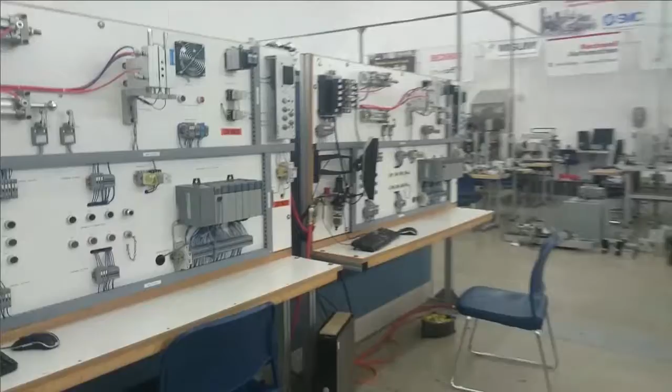For this industrial robotics experience, you're going to start by going over to the sim building, and you need to go find room sim 190, which is this automation studio. The folks over in the sim building have set up a couple of these training boards to teach students all about how to program PLCs.

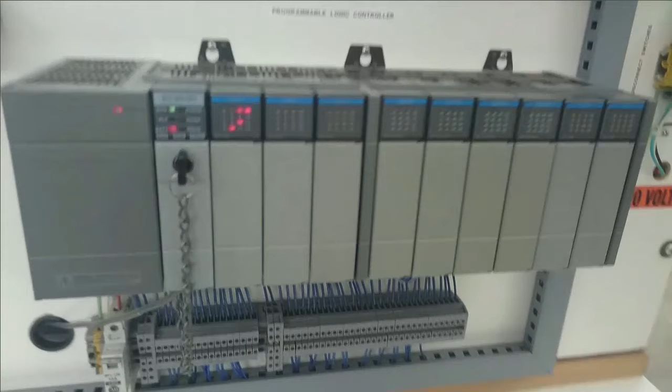So go over to these boards here and take a quick look around at the parts that are up on the board. And I'm going to start today by giving you a brief walkthrough of what each of these parts is. This board contains a complete setup of parts to introduce you to industrial automation. To start with, take a look at this box over on the right hand side of the board near the bottom. Each of the parts on this board is the industrial version of different kinds of parts that we've used in lab before to do our mobile embedded robotics.

In general, the kinds of parts that we use in our labs are the parts that you would use to make robots that are mobile. In order to make mobile robots, you need to run on lower voltages and use small currents so that the batteries that you use to run your robotic devices will last sufficiently long. But in some cases, you would like to be building robots that will not be mobile. They won't be driving or flying or swimming or being worn by someone. These robots would be perhaps located in a factory and attached to the ground, and they can be connected to a power source at all times.

Now you know that with the parts that we use in lab, in the case where we want to use a part that runs on a higher voltage or uses a higher current, we have to use some kind of external part like an H-bridge or a transistor or a relay or something like that to prevent the higher voltages and currents from going through our microcontroller. Now, in the case where your entire system is connected to power and all of the parts you're going to be using run on higher voltages or currents, it makes sense to use a kind of controller that can handle these higher voltages and currents. And the most common type of controller that can do this is called a PLC. And that's what you see here in this box.

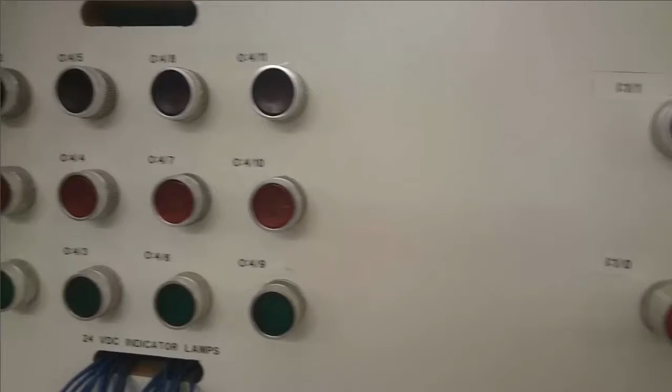Now, if we look at other parts on the board, you'll see over here we have some push buttons. These would be digital inputs. And you'll also notice that each of these has a label next to it. We'll be using that later. These things over here are LEDs, so they are outputs. You'll notice that the labels by the LEDs, which are outputs, start with an O. The O is for output. If you look at the labels next to the buttons, they start with an I for input.

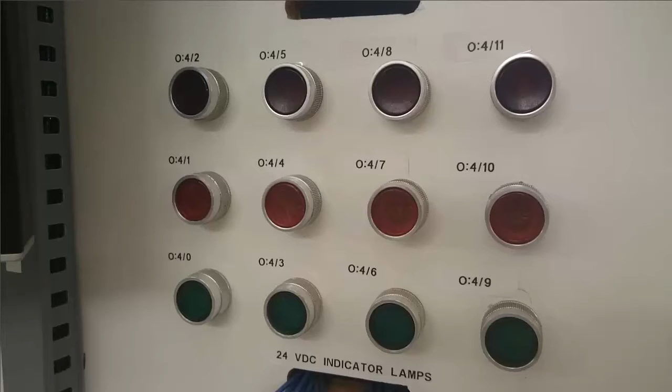So we have a bunch of LEDs, a bunch of push buttons, and if we scan up here, we also have some pneumatic actuators. Pneumatic actuators are a type of actuator that can be either on or off. We can extend the actuator or we can retract it, but it's not very easy to get a pneumatic actuator to hold a position between its extended position and its retracted position.

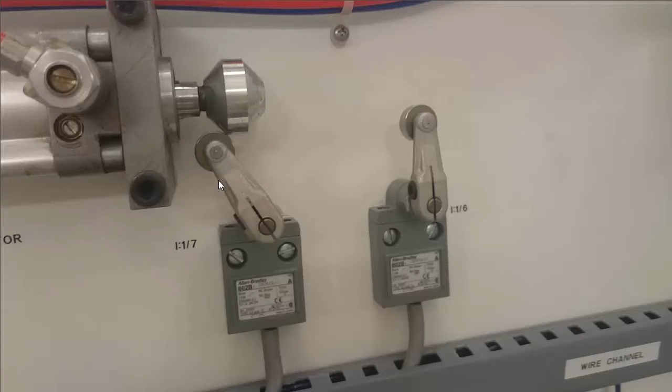You'll also notice to the left of these pneumatic actuators, these are valves. This is how we extend and retract pneumatic actuators. We do it by turning valves on and off. Each of these valves has two tubes leading from it. One of the tubes is for extending the actuator, and the other tube is for retracting the actuator. So you'll notice that these are also labeled with an O. This actuator also has a switch that can determine whether the actuator is extended or retracted. So you'll notice that the label next to these switches starts with an I because this is an input.

Now, the computer is where we're going to actually write our code. On the computer, find the folder that's labeled Dr. Sodeman and open that folder. Here we have some code templates that have been made for us. In this folder, start by finding the file that's called Exciting Demo.

We're going to start by just running this code that has already been written for you so that you can see a demonstration of what the different parts on the board can do. Double-click on this file to open it. This will also allow us to learn how to download code to the PLC and run it. Take a look at this code for a moment.

You'll notice that this screen looks very different than the kind of code that you are used to writing for the PSOC. The kind of code that you write for the PSOC is the language C, and it's a kind of a language that's called structured text. In contrast, a PLC uses a kind of a language that's called ladder logic. It's called ladder logic because, as you see, it has these wires strung from the left to the right that kind of resembles the rungs on a ladder.

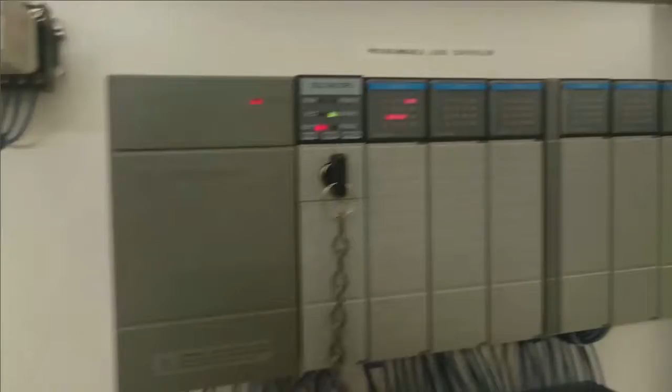So to download the code, first take a look at your PLC. There is a switch on the PLC that can be turned, and it can be turned to point at Run, REM, which stands for Remote, or Prog, which stands for Program. Switch the key so that it's pointing to the program, like that. And then back in your code, up here in this drop-down list where it says Offline, click on Download. Click OK to proceed with the download, or click on Yes, and the code will be downloaded. Then it will ask you if you want to go online, and say yes.

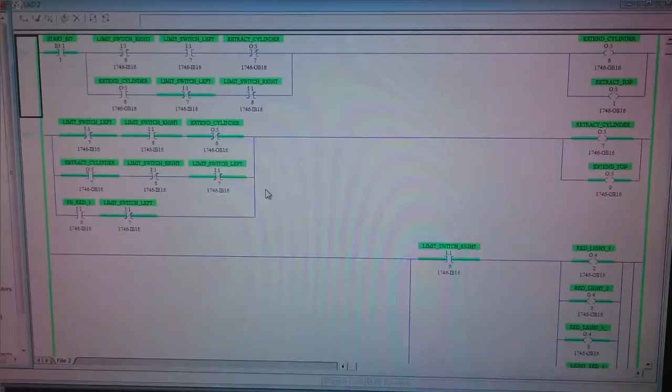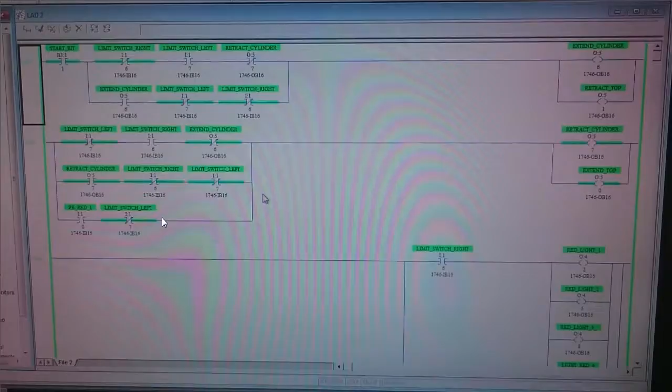Now, the code is not running right now because you first have to switch this switch over here to run. Now, the code is written to start when you press this button. So press the button and all of the different kinds of outputs will cycle through their on and off states. If you watch the code while this is running, you will notice that there are these green lines. Let me go back and look at this again. That turn on and off. The green lines are showing you which of the inputs are being actuated and which of the outputs are being actuated, so that you can watch what's happening in your code while the code is running.

Now switch this switch back to program to make the program stop running. And the next thing that we're going to do is write some very simple code ourselves to help you see how ladder logic works. Close the existing demo code and go back into the Dr. Sodemann folder. In the Dr. Sodemann folder, find the file called Robotics template.rss. Double-click it to open it.

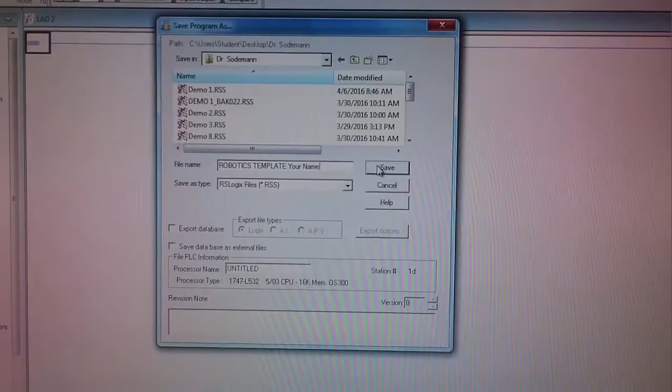The first thing you should do is click on File and then click on Save As. For the file name, give it a name that includes your name or the names of your group members, and then click on Save so that you can save this file to access it later on, and so that other people can access this blank file also. So give it your name and then click on Save. This is a blank file that starts out with no code written. We're going to start by writing some simple code of our own to see how ladder logic works.

In your code window, right now you have just one single rung in your program. This rung works very similar to a wire. When your code runs, imagine that electricity is going to flow down this wire. On this wire, we can place inputs and outputs. The inputs serve as switches. When the switch is open, the electricity cannot flow through this wire, and so any outputs that we put on the other side of the input will not go on. However, when we press the switch or actuate the input, the output will be actuated because the electricity is allowed to flow through the wire. Let's write some test code to help illustrate how this works.

The first thing you need to do is to place a new rung into your code. To do that, let's take a look at the different kinds of things that you can place here up at the top. This first item is a new rung. You can click and drag this item down to your screen to place a new rung into your ladder logic.

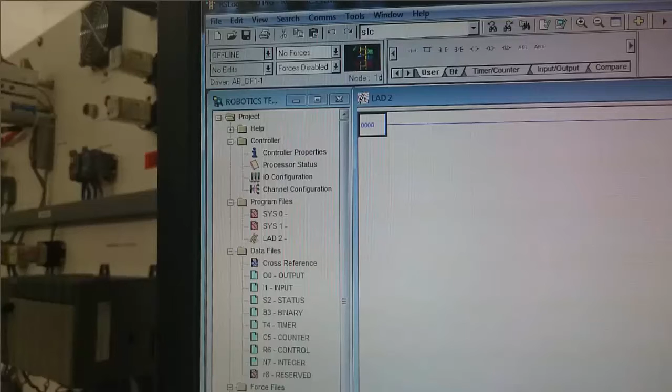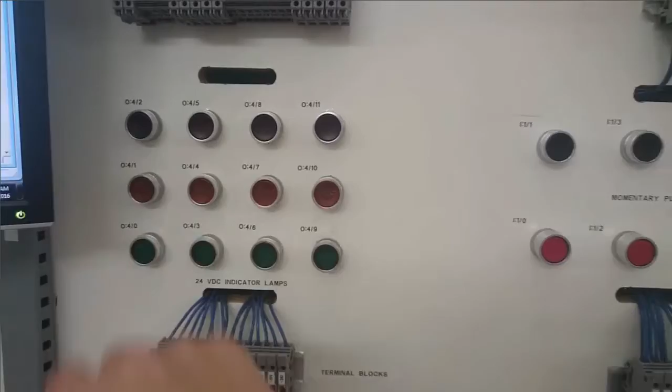Now, here is what we want our code to do. This will be a very simple starter code. I would like it to be that when we press this button here, this LED over here will go on. Let's write that code now. We need to start by placing a new rung. First, we need to make sure that this rung is highlighted. You might have to click on it. Then, click and drag a new rung.

And when you drag the new rung down, you will notice that a little green box appears like this, indicating that you can place a new rung here. When you see this green box appear, let go of the mouse button and that will place a new rung on the screen. And now your code should look like this with 2 rungs. Now we can click here at the beginning of the rung to indicate which rung we want to be using. Click on this first rung to highlight it because we're going to place our code there.

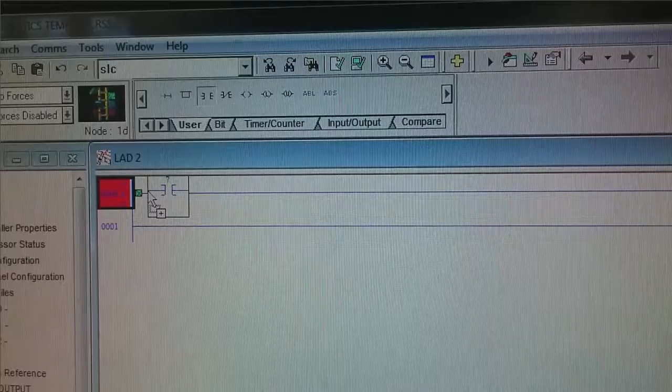Now go up to the top and find an Examine If Closed item and drag it down to the screen. When you drag it down to the first rung, a little green box will appear at the beginning of the rung. When you get that little green box, let go to place the switch on the rung. Right now, this switch input that you have placed has a little question mark at the top. That's because we haven't yet assigned which input corresponds to this switch.

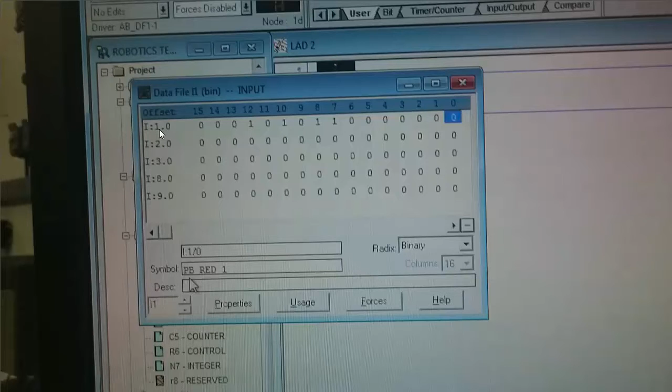Let's right away go assign this input. In the left-hand side of your screen, find the Input item under Data Files and double-click on it. It will open up a window that looks like this. Here we have a matrix of values. Each row corresponds to a number that is the first number in an input. So the first row is input 1 dot something, the second row is input 2 dot something, and so forth.

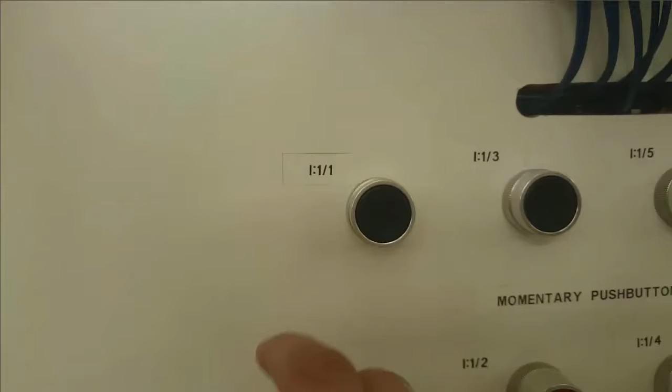Now let's look over at our buttons. Notice that this first button is labeled as input 1, 1. Look back at this matrix and go to row 1 and then follow it over to the column that also says 1. Input 1 dot 1 is right here. Click and drag this item up to the top of your input.

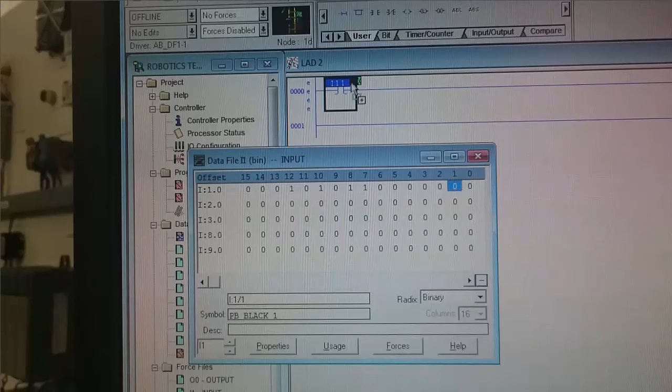When you get this item dragged to the top of your input, a little green square will appear at the top of the input, indicating that you can drop that input there. When you get the little green square, let go of the mouse button to assign that switch to that input. We've now assigned switch 1, 1 to the input switch which we've placed on our rung. Now you can close this window.

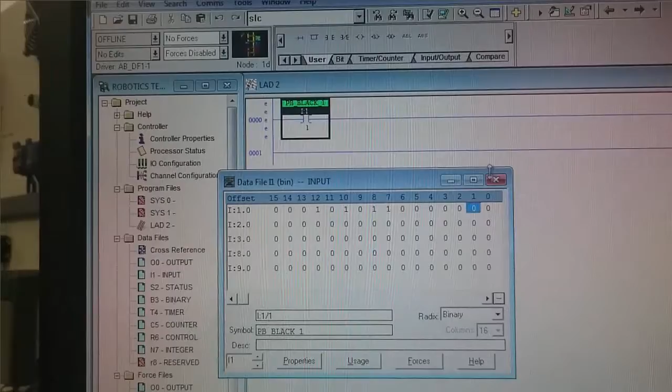Next, we want to place an output. Find Output Energize and click and drag. If you don't get that little green square, go back to the beginning of the rung and click to select the rung. Then try it again. Click and drag Output Energize until you get a little green square and then let go. Now we want to go over to the left-hand side of the screen and find the item called Output. Double-click on the outputs. You'll see that we have a matrix very similar to what we had for the inputs.

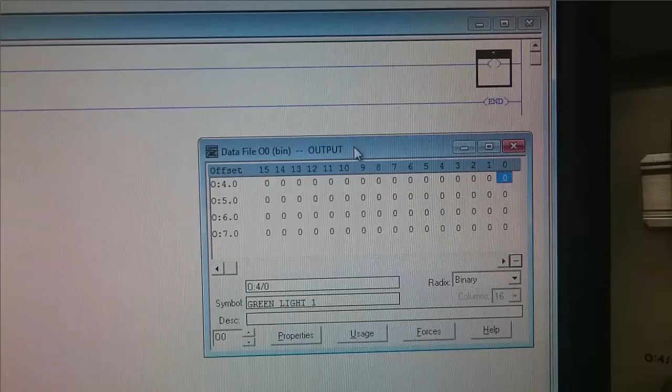This matrix works the same way. So the first thing we need to do is go look at our LED output and see what the number is. It's labeled as output 42. In our matrix, we're going to look at the row that's labeled 4 and the column labeled 2, and we're going to click and then drag up to the top of our output until the little square at the top turns green, and then we let go.

You'll notice that our 4-2 gets placed here and it's called red light 1. You can close the output window. And now we want to program the PLC with this code. Let's think for a minute about what we just programmed to our PLC. Here we have a switch, and you'll notice that the switch appears to be open right now.

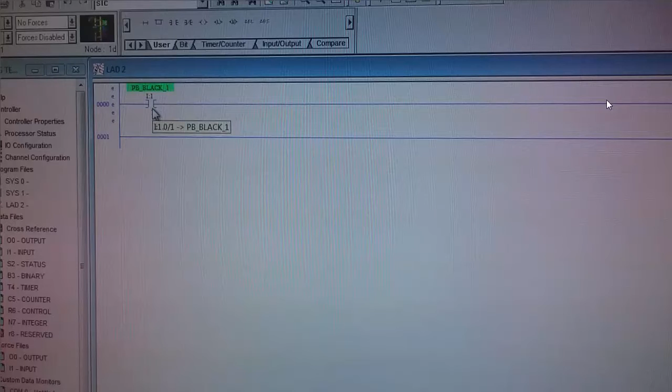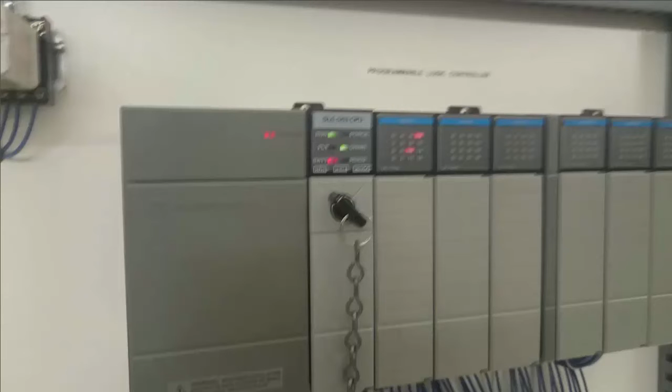If we think of this rung as being a wire, the electricity will not be allowed to flow from the left to the right because it will be stopped by our open switch. Therefore, it will never turn on the red light. But when we close the switch, then it will turn on the red light. So let's download this code to the PLC. The first thing you need to do is go over to the PLC and turn the key to the program position.

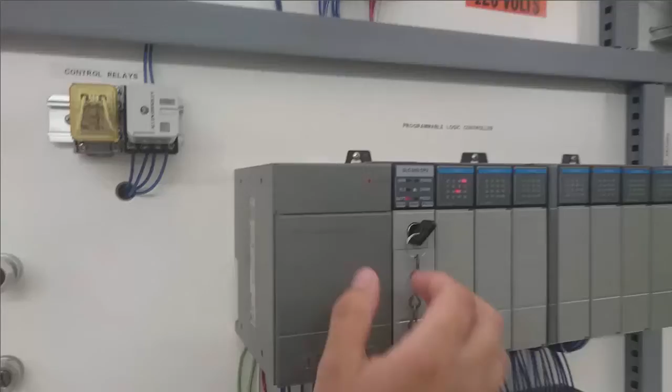Now, over in your code, click on the drop down arrow by offline and click on download. Click yes to proceed with the download. Then click yes to go online. Now the code is online, but if we press the button, nothing happens because we haven't yet switched our PLC to run mode. Switch the PLC to run mode and then press the button. The red light should go on when you press the button.

Also, we can monitor what's happening with the buttons and the lights in our code. Every time we press the button, this little green line should appear on the switch, indicating that this switch is closed. Then the green light should also appear on the output, indicating that the output has been activated. Try pressing your button a couple of times and watch what happens in the code while you press the button.

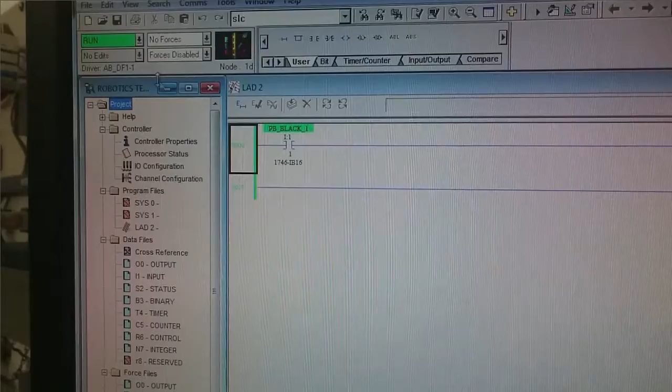You may notice that the code that we've just written is the same as an if statement that we could write in structured text. Our code here says, if the switch is closed, then turn on the light. Now, click on the drop down by where it says run and click on go offline. Let's write another program that's a little bit more complicated.

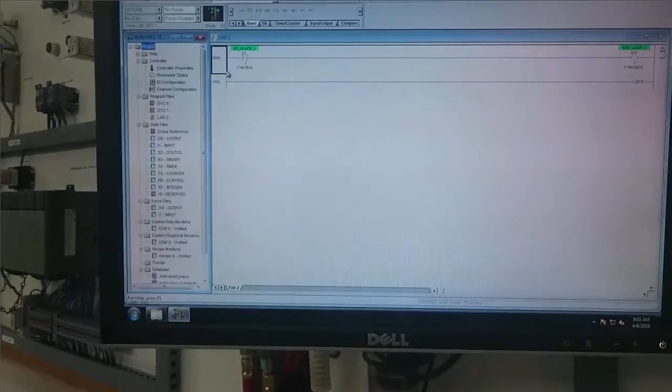In this code, let's make it so that the red light will only go on when we press both of these two buttons. In other words, let's write some code that will not turn on the red light if we press only the first button, or turn on the light if we press only the second button, but it will turn on the red light only if we press both buttons. And let's use the same LED as our output. So if I press both buttons, then I want the LED to go on. How could we do that in our code?

First, click on the start of the first rung to make sure that it's selected. Then go to the top and get another one of these switches and drop it onto the rung next to our first switch. Open up the input matrix again, and this time we want to find the input that corresponds to the second button. The second button is labeled input 1, 3. So we're going to go to this matrix to the first row and the column that's labeled 3, and we're going to drag that item up into our second switch.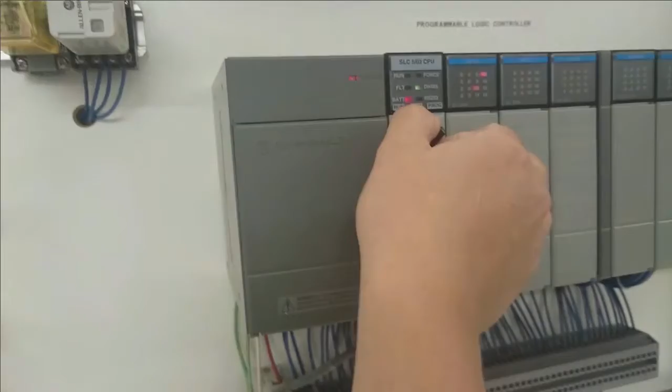Now click on the offline drop-down list. Make sure that the PLC is switched to program and click on download. Click yes to proceed with the download, and then yes to go online. Now switch the PLC to run mode and test to see what happens. When we press the first button, the LED does not go on.

However, we notice that when we press the first button in our code, the green light goes on around the first input, showing that it detects that we have pressed the first button. However, you'll notice that the green light does not go on the second input because we have not pressed the second switch. Therefore, the output also does not go on because we've pressed the first switch, allowing electricity to go through that switch. But the second switch is still open, so the flow of electricity is stopped there.

Likewise, if we press only the second button, we can see in the code that that button is activated, but again, the LED does not go on. The LED only goes on when we press the two buttons at the same time, therefore closing both of the switches and allowing the output to be activated.

What we've done here is an AND operation. We've programmed the LED to go on only if switch 1 and switch 2 are both pressed. If we were writing this code in structured text, we could do this by nested if statements. We could have one if statement that says if switch 1 is closed, and then we could have a second if statement inside of the first one checking to see if switch 2 is closed.

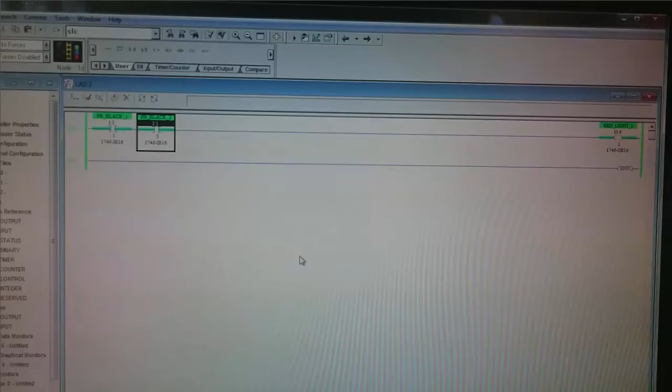Next, let's see if we can write a program to do an OR statement. In this program, I would like to have the red LED go on if I press the first button or if I press the second button. Switch the PLC to program mode. Then, in this drop-down list, go offline.

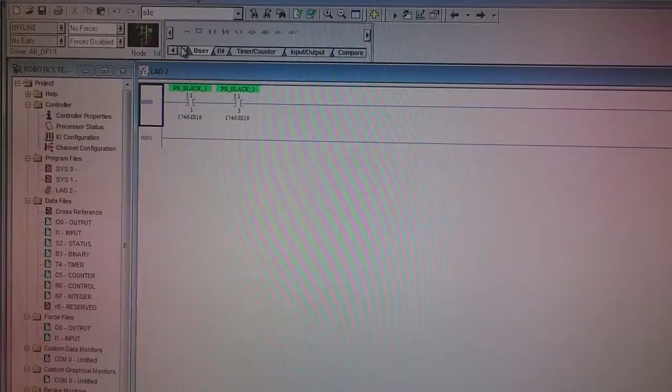In order to write an OR statement, we're going to get a second wire in addition to our first rung, and this rung is going to be a rung branch. It's going to be a wire that can bypass the first switch. So find the item that's called a rung branch and click and drag. Make sure the first rung is selected before you do this. Then drag the rung like I did here.

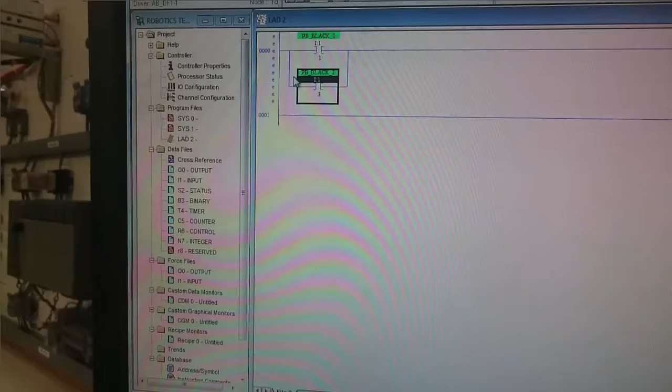Now take the first input and click and drag it. Place it in the top of the branch as I've shown here, and take the second switch and drag it to the bottom of the rung. What we've done here is created an OR statement. Can you see how this code is an OR?

If we press switch 1, the electricity will be allowed to flow through that first switch and reach our output. Or if I press switch 2, the electricity will be able to flow through this branch and still reach the output. It will also work if we press both switches, but it will not work if neither one of the two switches is pressed. Let's test this code and see if it works.

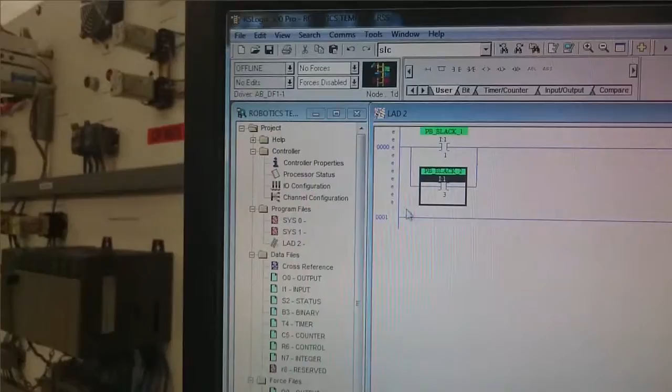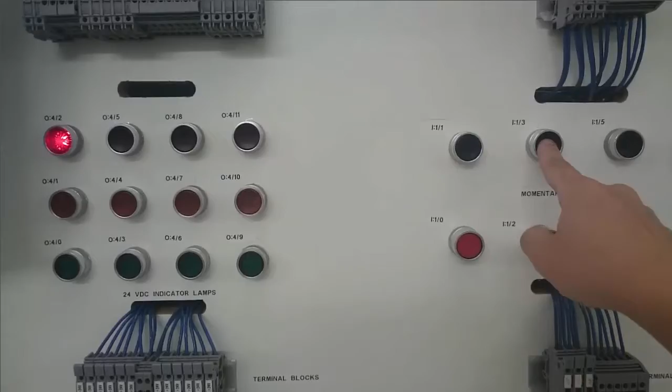Click on Download. Click Yes to proceed with the download. Yes to go online. And then switch the PLC to Run. And let's test the code. The red LED should go on if you press the first button or the second button or both, but it should not work if neither one of the switches is pressed. Watch your code to see which switch is being activated and when the output is being activated.

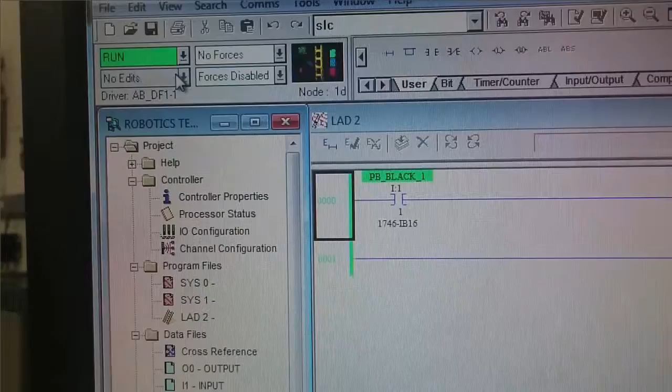So far, we've used push buttons and LED lights. Now, we're going to take a look at what we can do with some of these pneumatic cylinders. To begin with, go up to this drop-down list where it says Run, and let's go offline. Up at the top of the board, you'll see these two cylinders mounted on the board. These are two pneumatic actuators. They can extend or retract.

You'll notice that there are two tubes going to each actuator. For each of these actuators, one of the tubes is to make it extend and the other is to make it retract. You'll also notice that underneath the cylinder there are two input values labeled. These two inputs are connected to sensors that can detect whether the cylinder is extended or retracted.

If you follow the tubes back, you'll see that they're connected to these valves, and that each of these valves has two numbers on it, and these two numbers are labeled as being outputs. These two numbers tell you which output is for extending the cylinder and which number is for retracting the cylinder. Right here, these two numbers are the ones I'm talking about.

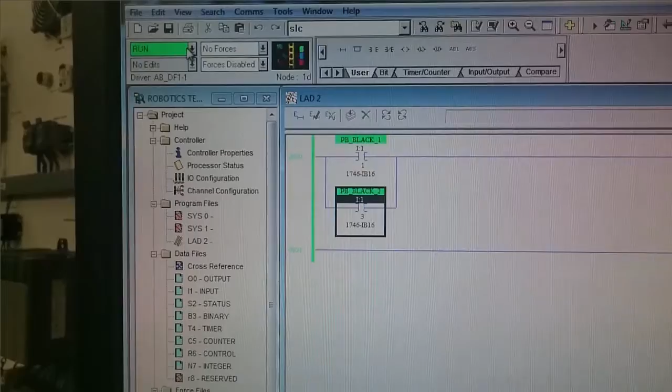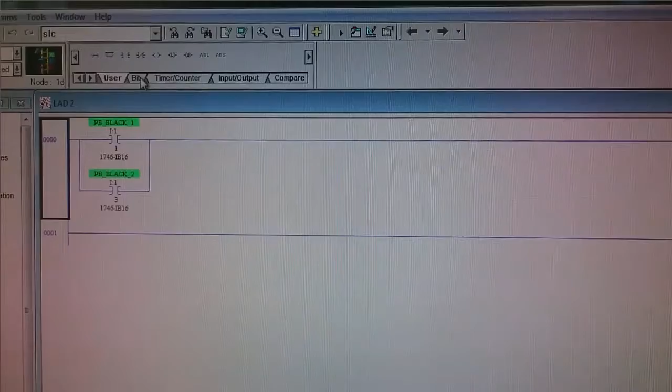Now, go down to your code and go offline. We want to add an output to make the cylinder extend when we press the button. So start by selecting the rung and then try and go get an output. First, place the output on the same rung as the LED. Open the output list.

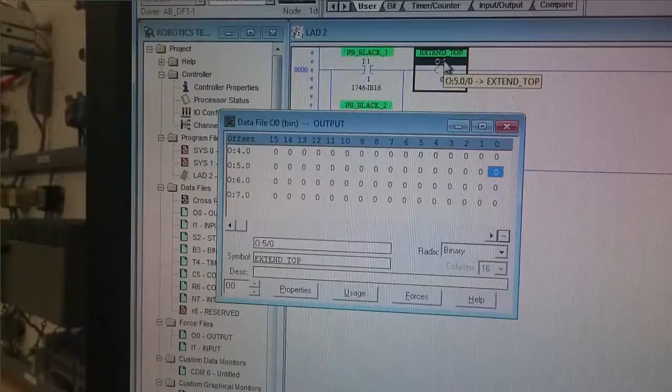5-1 and 5-0 are the two numbers that are labeled on the cylinder. You'll notice if you hover over 5-1 and 5-0, these two things are labeled as retract top and extend top. That means that those two outputs are for retracting and extending the top cylinder. Try to drag extend top to this output, and then we're going to try and download this code. When you do this, you'll notice that you get a warning that says program has errors, cannot download.

This is because we made a mistake in the way we wrote this code. In this rung, we've placed two outputs in series with each other. In ladder logic, it may seem like this would work. When the switch goes on, this output will go on, which will make this other output go on also. But as it turns out, you can't do this.

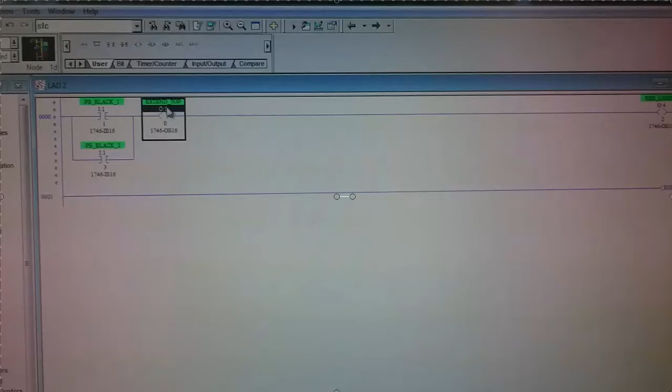Instead, in order to make both of these outputs go on when these switches turn on, we need to use the same kind of a trick that we used a moment ago with the inputs. We need to go up to the top and get a branch.

Select the rung and then get a rung branch and drag it down onto your rung. We're going to take this one output and place it in the top of the rung, and we're going to take this other output and place it in the bottom of the rung. Let's try this again here. We're going to take the top one, place it, there we go, and then we'll take the other output and place it in the bottom. There we go. So now we have two outputs that are in parallel with each other.

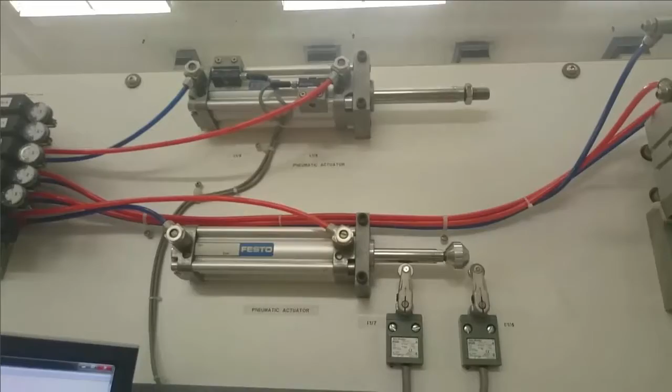Switch to program mode. Then click the drop down and download the code. Go online and then switch to run. Now, when I press either one of these switches, the top cylinder should extend.

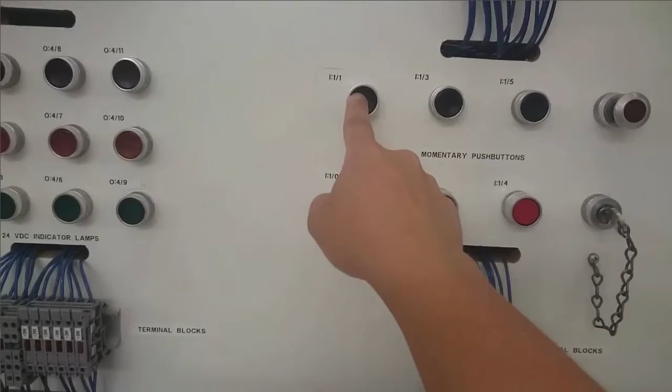You'll notice that the cylinder does not retract, regardless of whether you press the button or not, because we haven't yet put an output that tells the cylinder to retract. For now, you can just make the cylinder extend by pressing either one of these switches. Switch the PLC back to program mode. Let's see if we can get the cylinder to retract when we press one of the other buttons.

Go offline, and we're going to modify our code so that the cylinder extends when we press one of the buttons and it retracts when we press the other button. Go up here and get a new rung. So you now have 3 rungs. We're going to take one of these buttons and place it on the second rung. Now we're going to take a new output and place it down here.

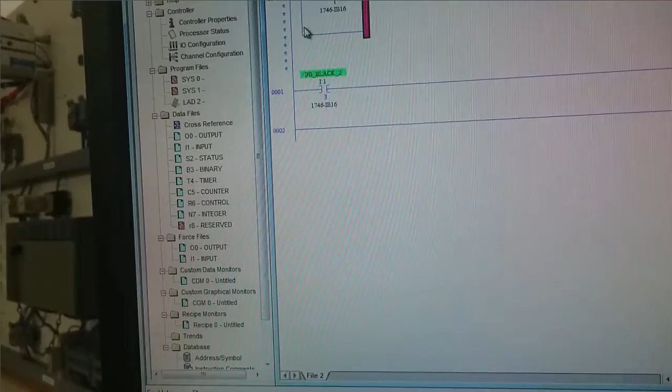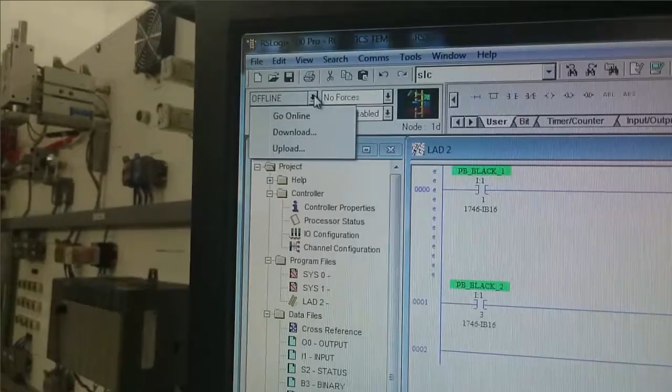Open up the output list, and now I'm going to get the retract output, either 5.0 or 5.1. Let's take a look here. 5.0 is extend and 5.1 is retract. So I'm going to put retract into this output. Now we need to delete this branch. Click to delete the branch, and then we're going to download the code.

Switch the PLC to run mode. You should be able to make the cylinder extend when you press the first button and make it retract when you press the second button.

We're now going to try writing some code that is a little bit more complicated. This code will introduce you to some new features that you can do on a PLC, like latched outputs. We're also going to see how you can use the results of an output as an input. For this code, we want to start by using this button here, and when we press that button, we want to make this cylinder extend and retract, and then extend and retract again over and over again once we've pressed the button.

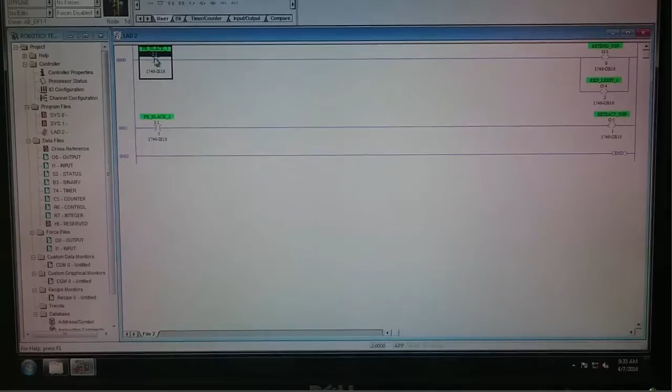Now notice that there are these two switches shown here that are labeled as inputs, input 1.7 and input 1.6. These are the two inputs that are turned on and off when the shaft of the cylinder hits these two switches. Also, we can follow the tubes back to find which outputs right here will cause this cylinder to extend and retract. Now let's go to our code and let's clean it up a little bit by deleting the things that we already have here. We're going to start from a blank screen to create our code for this cylinder extending and retracting.

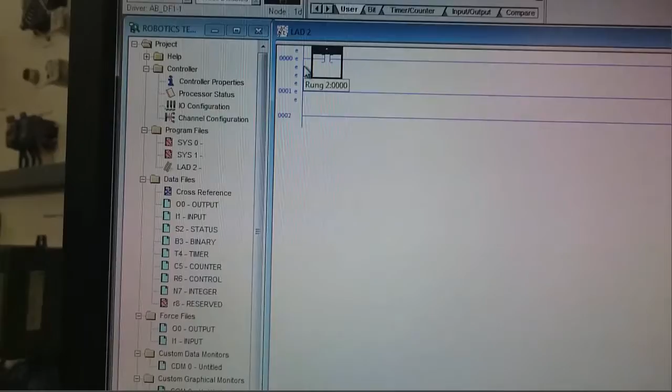Once you've deleted all the parts, select the first rung and go get an input and drag it to the first rung. Then open up the inputs, and we're going to go over here and see which input is the switch. And we'll drag the 1.1 input to this input. We're going to use this input as a way to start our code regardless of whatever state the cylinder might be in.

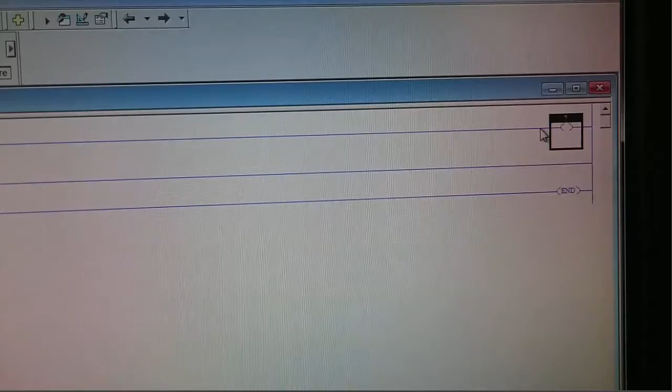So now go and get an output. Oh, we have to select the rung. Then go get an output. And open up the window to assign this output. And let's look back at what we want to assign it as. We want to extend the bottom cylinder. So find extend the bottom cylinder and drag that to the output.

And now we're going to select the second rung and place an input here. Next, let's look back up at the switches that we saw before. We just placed an output that says extend the cylinder. This switch over here will be triggered when the cylinder is fully extended, and that is input 1.6. So we'll go back to our code, to this input that we just placed here, and we're going to get 1.6. We'll assign 1.6 to this input.

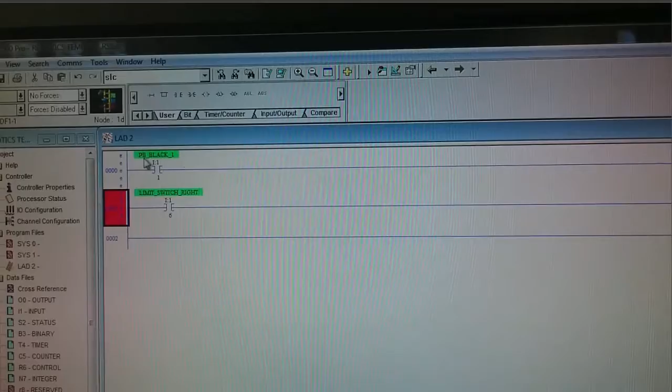Then we'll go get another output. Here, we're going to assign this output to retract the bottom cylinder. Now, let's think for a moment about what we think this code is going to do.

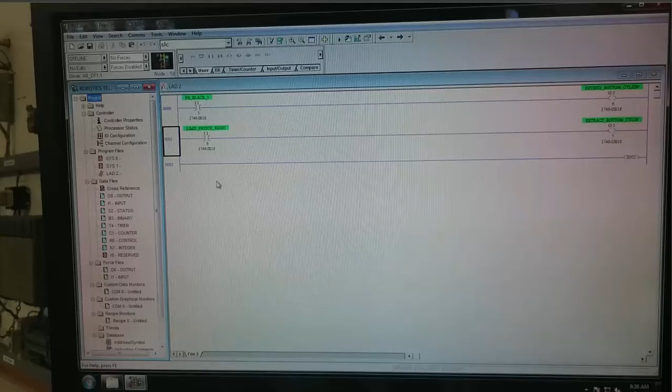First of all, if the switch 1 is never closed, then extend the bottom cylinder over here won't happen. But when we press the first switch, the cylinder should extend. When the cylinder is fully extended, the switch down here will close, and so the cylinder should retract. Let's test this code and see what actually happens.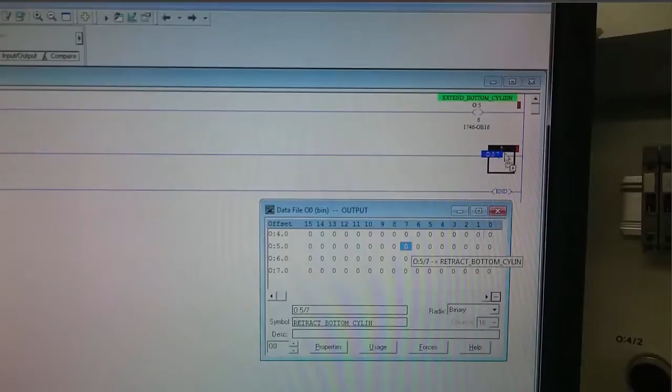Let's delete the retract output, and this time we're going to find the output latch element and drag it here instead. The output energize item that we've used before only turns the output on as long as the input that comes before it is true. A latch works a little bit differently. With a latch, once it is turned on, it stays on until it is turned off again. Let's see if this changes the effect of how the cylinder behaves.

We'll run the code. Now, when we press the switch, the cylinder extends, and when we let go of the switch, the cylinder retracts. This time, the cylinder retracts all the way. Now, let's go back to our code again. Go offline so that we can make some changes.

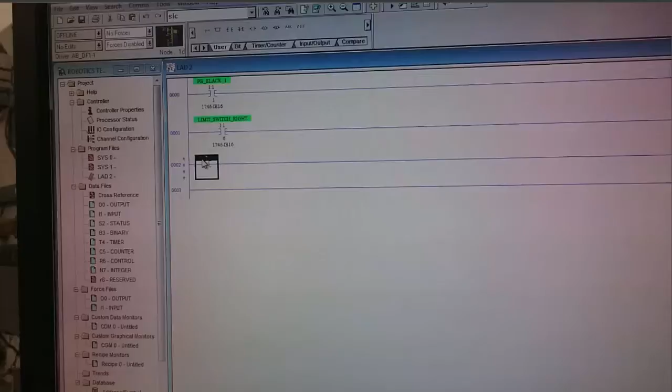Add another rung, and then let's add another input to this rung. We're going to see if we can get the cylinder to extend and retract over and over again in series. For this input, we want to use the other switch, the switch that is triggered when the cylinder retracts.

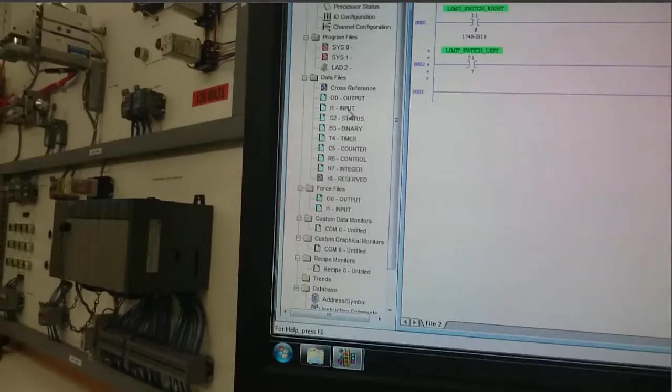Now, we'll get an output unlatch to begin with. When the limit switch on the left is triggered, we want to unlatch the retract, and we want to latch the extend at the same time. So for this unlatch, we're going to unlatch the retract. Now, let's test this code.

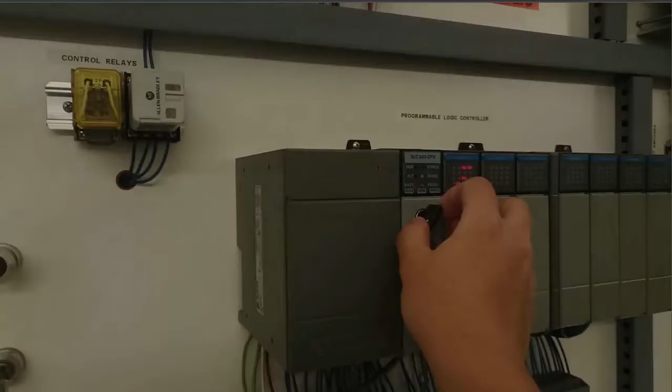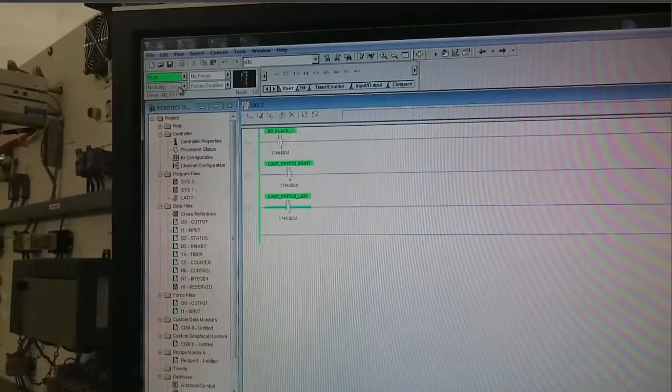When I press the switch, the cylinder extends, and when I let go of the switch, the cylinder retracts. But the cylinder never extends again when the left switch is pressed. That's because we haven't yet placed the latch to make the cylinder extend. So let's go offline, and this first output up here, let's delete it because that's just an output energize. Let's make it be a latch.

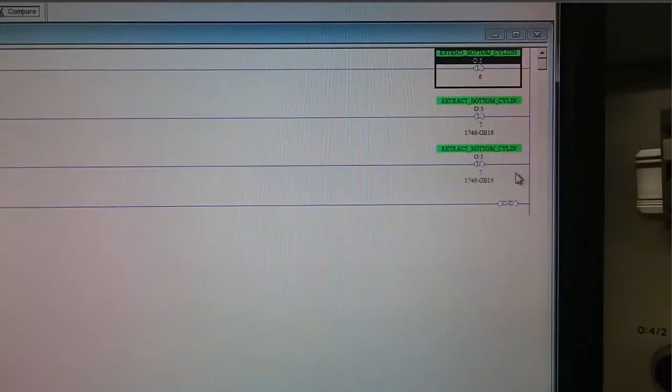Now select your second rung and let's place a branch here. Rather than simply latching the retract, we're going to need to unlatch the extend at the same time.

We need to do the same thing on the third rung. Go get a branch so that we can unlatch the retract at the same time that we latch the extend. Get an output latch and drag it into the bottom of this branch. Now let's test the code.

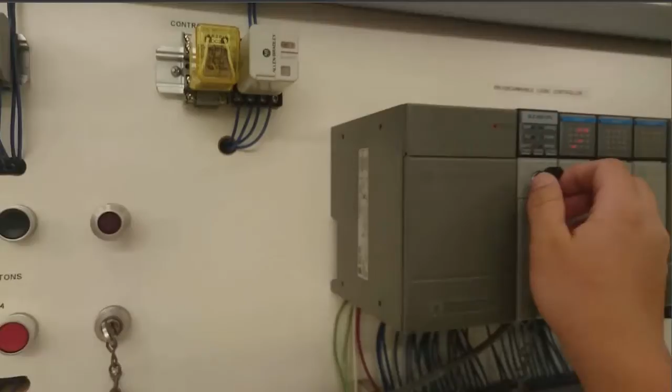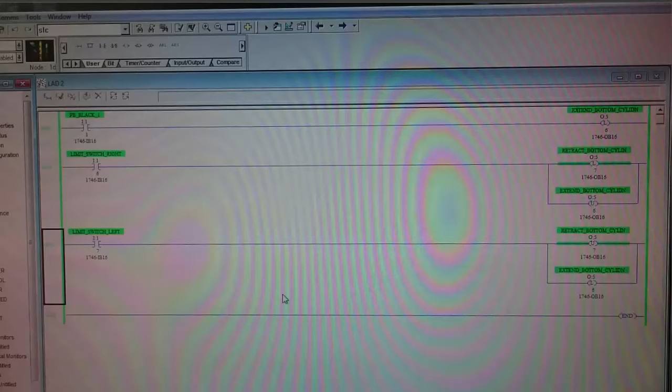Note that the button is now only used to start the code in the case that the code starts with the cylinder neither extended nor retracted. As long as the cylinder starts in one of those two states, the cylinder will continue to extend and retract whether or not we press the button. While your code is running, you can watch the program on the screen to see what turns on and off in what order. Once you get this working, you know everything you need to know to try and solve the final task here.

For your final task, we're going to use one of the pieces on the board that haven't been used before, but all of the code that you need to place in your ladder logic you've already learned. Latches, unlatches, output energizes, switches, AND operations and OR operations. Here's what you need to accomplish.

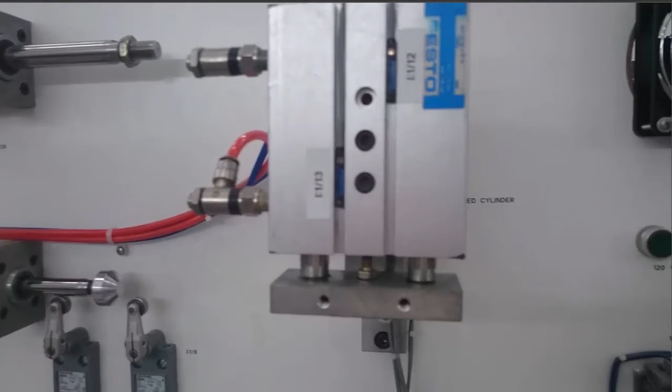For this task, take a look at the two cylinders that are over in the upper right-hand corner of the board. Here, there are two cylinders that are attached to each other, one that moves in and out horizontally and another cylinder that moves in and out vertically. I would like you to figure out how to write some code in ladder logic to make this 2 degree of freedom manipulator extend and retract.

In other words, I would like you to write some code that makes the horizontal cylinder move out, the vertical cylinder move down, and then moves back to its starting position, with the vertical moving back up and the horizontal moving back in. It should do this over and over again on its own, just like we did with this single cylinder a moment ago.

You can use a button to start the code if you would like. But after your code is started, you shouldn't need to press any buttons anymore to make the motion happen. It should simply extend and retract just like this cylinder did in the test code. You can use any combination of ANDs, ORs, branches, any number of rungs that you need, and latch or unlatch or output energize items that you need.